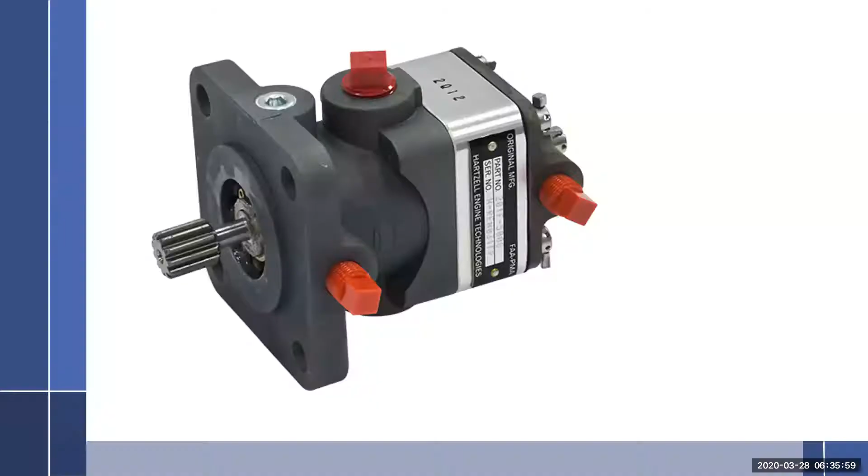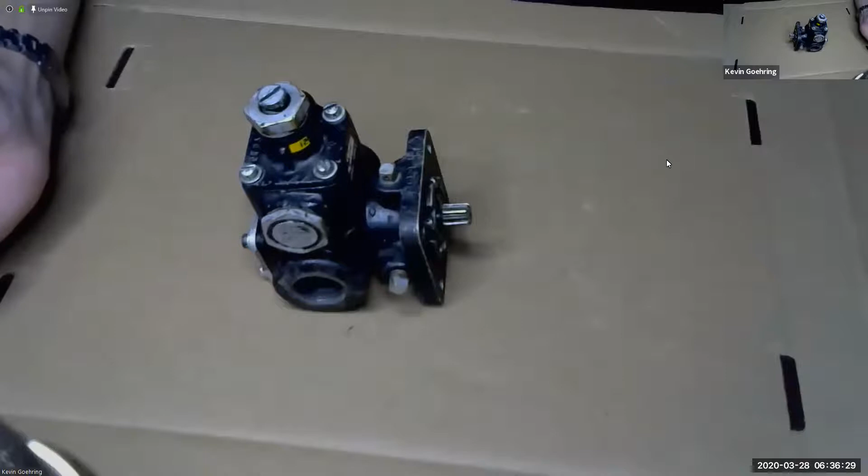Thanks. See what I mean? There it was. Now it's not. We're just gonna switch it. Finally. All right. Okay, you guys can see that okay, I take it? Let me see if I got a full screen. Oh, that's even better. Okay, so light looks okay for you guys? You're seeing everything, hearing everything okay? Yes, it looks okay. Yeah.

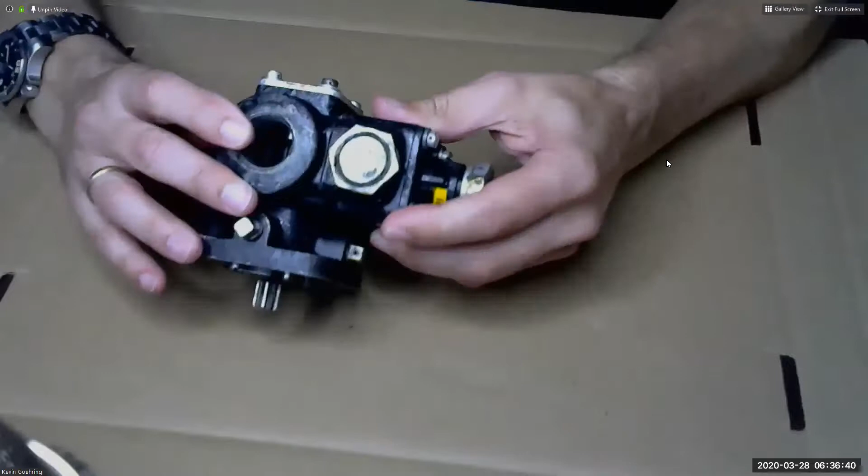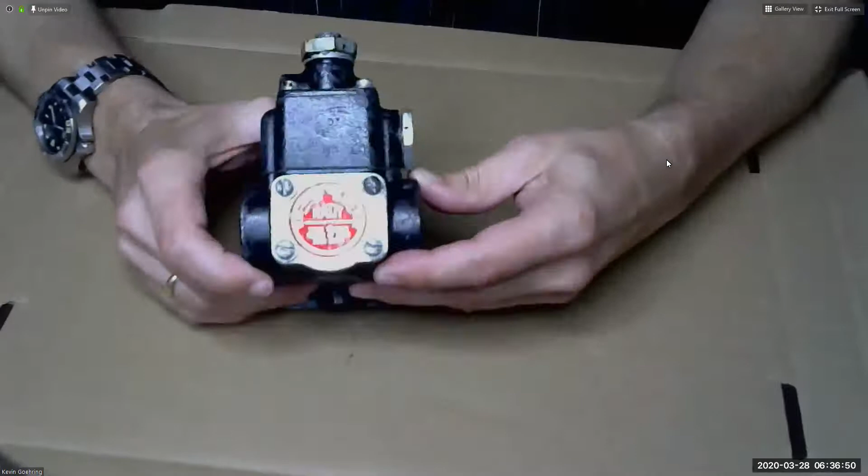All right. This is the rotary pump that you're going to work with. We have inlet and outlet, outlet and inlet. Let's see, I picked kind of a bad one here. You can't see that real well, but here's some arrows. And that little plate says inlet and outlet. That little plate tells you which one is the inlet and which one is the outlet, depending upon which

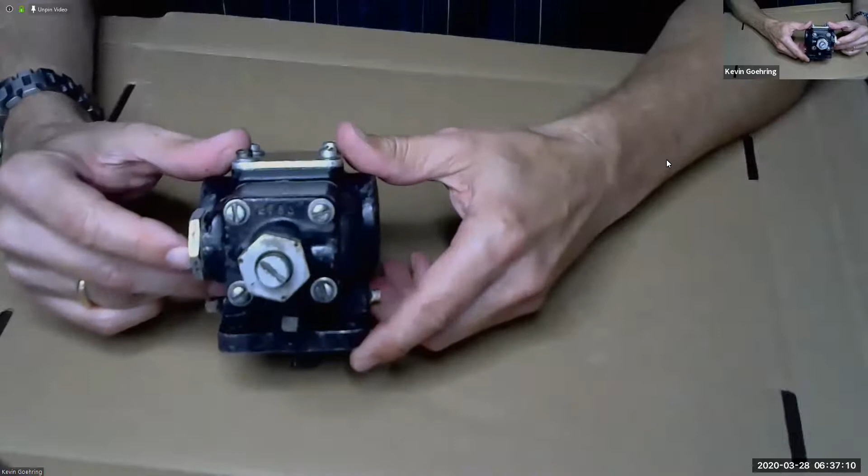way this rotates. Which way does it rotate? Well, it'll rotate either which way. So if I'm rotating it this way, is that clockwise or counterclockwise? Counterclockwise. All right, remember, the rotation of any component is when viewed from the drive end. So don't look at it here where it says it's going that way around and say, oh, okay, that's clockwise. So I'm turning it the way the arrow goes right now. Is it clockwise?

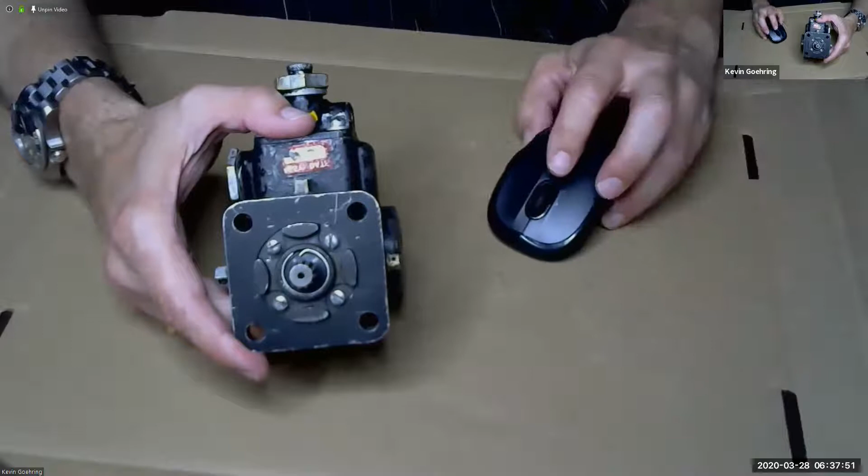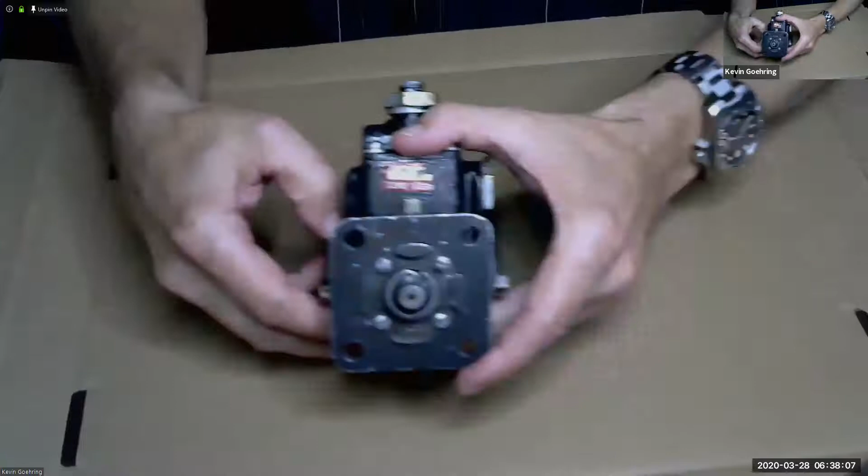Hey, Kevin. On Zoom, with the camera stuff, there's a mirror effect on. It's a weird setting. Oh, yeah, it's a mirror image. And it's also different when we look at it from your notes versus your actual webcam. Different views. How's that look? Left is right, right is left, just on the opposite side. Well, maybe I'll just, I don't know, I won't talk clockwise, counterclockwise then. Be careful, because to me it's going around. Yikes. This is just wonderful today. Why is it doing that? It's Monday. There is a pretty big delay when you move your hands. I think it's your internet, Steve. How would you know if I just moved my hand?

All right, let's get back to this. I will make it simple then. The direction of rotation is when viewed from the drive end. Clockwise is clockwise, counterclockwise is counterclockwise. Never look at this plate and try and determine the drive end from this plate. You can figure out which way it rotates, but don't look at this end. Got it? Hopefully you got that. Okay.

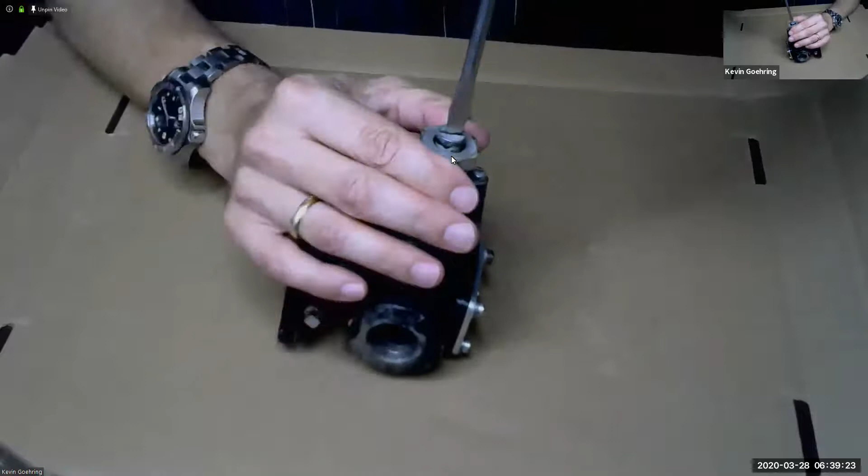So on the top, here's a lock nut. And that lock nut allows me to rotate the screw. This would be to increase pressure, screw down, unscrew to have less pressure. All right, we can take it apart. I just simply grabbed stuff from the cabinet and went, so hopefully this is a good one and it's not all messed up inside.

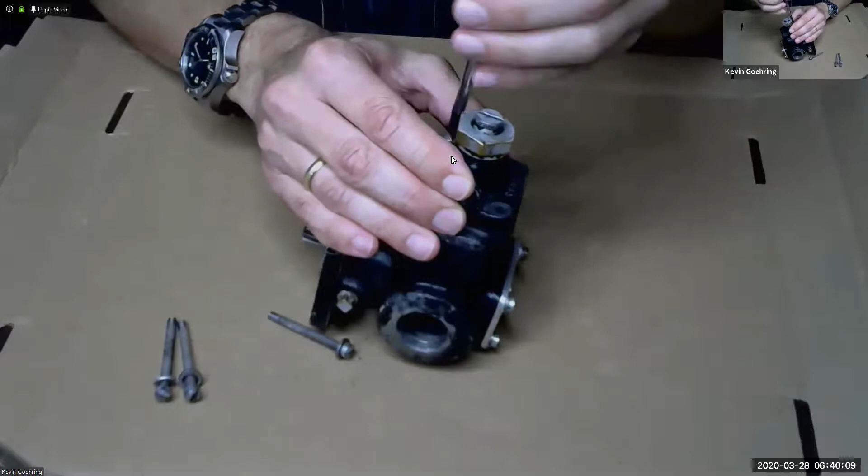There's a hole right here. What do you suppose that hole is for? Air bleed. Deck pressure. Bypass. Ooh, I heard one right answer. Bypass would be no. Mark had the right answer. Deck pressure, upper deck pressure. Yep, so this is a compensated fuel pump.

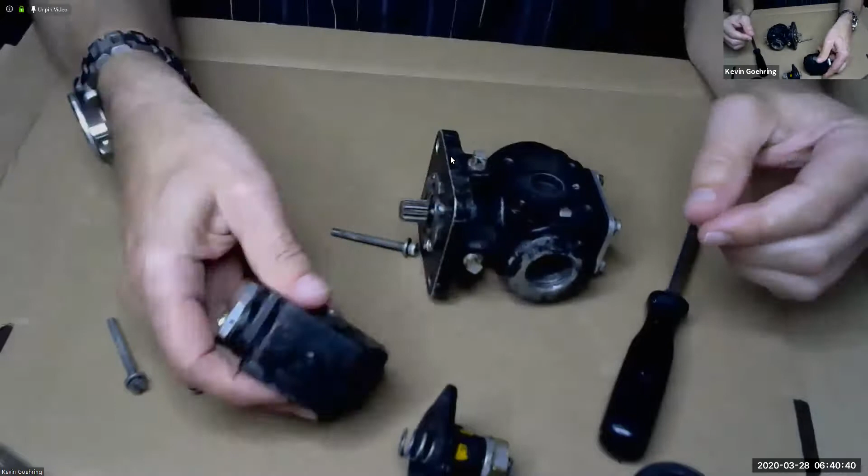All right, so I'm gonna pull that out. Got a spring. That's the spring pushing down on the diaphragm. Lift up the diaphragm, pull that out of the way. And inside here is the little cup. We'll go through that. This should come apart. Don't look. Any tool's the right tool. Plate off.

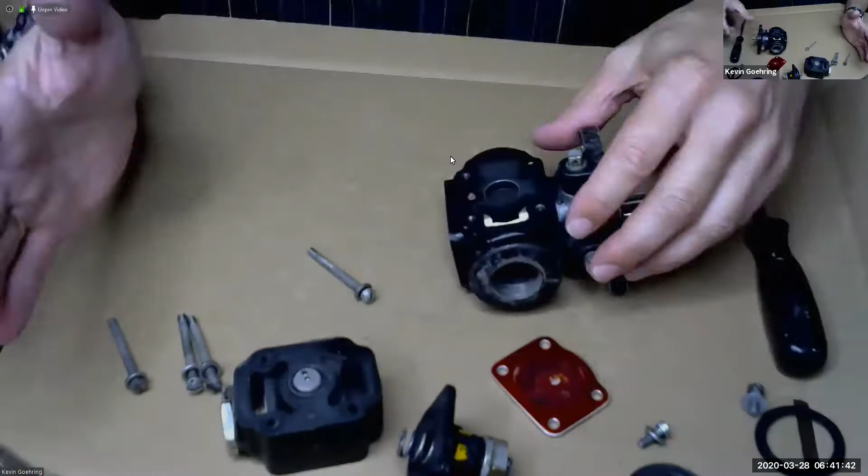Let's see if I can get it apart. These little O-rings right here are really delicate. There we go. A lot of this you have to press apart, and I don't have a press, so I'm just gonna leave it like this for now. We can talk about how it works. Right now, the pump could rotate clockwise or counterclockwise because this is going to dictate which way is the discharge and which way is not the discharge.

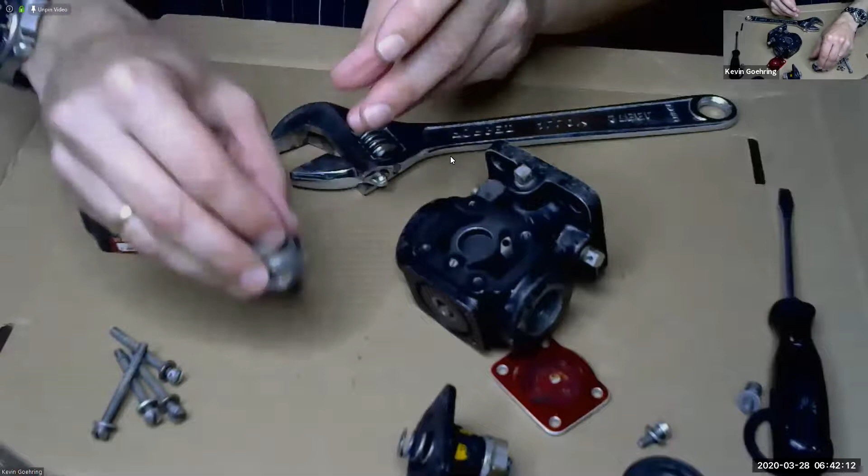Let me see if I can get this thing off here. This is the discharge end, and you'll figure that out in a little bit because here's a little tiny lightweight spring and a little plunger. So, all right, let's talk about what we got. A couple things. One, we talked about this hole right here, and that in fact goes to the upper deck pressure.

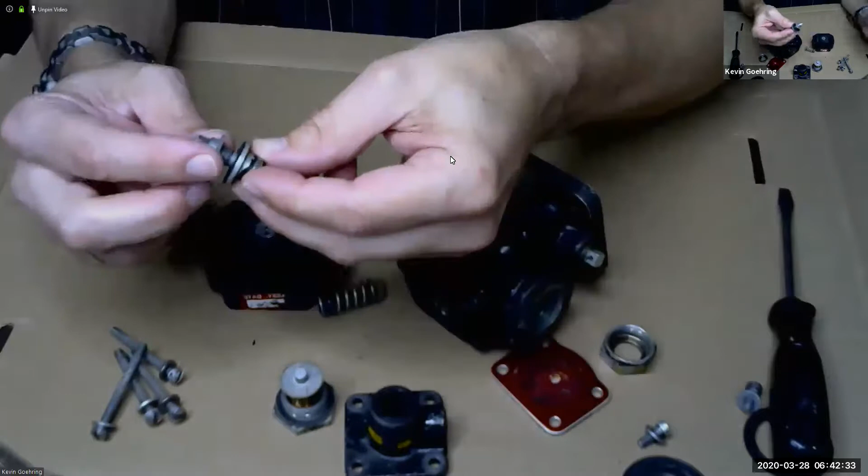This is the screw. Get over here. This is the screw and the adjustment that is going to go to the spring, and that spring is going to press down on the plunger apparatus.

All right, the funny thing about this is it's a left-hand thread. If I screw it in, it comes apart. So I'm screwing it to the right, righty-tighty, lefty-loosey, but it went backwards. So the fun part about that is I say, well, it's backwards thread. So if I want to increase pressure, what do I do? Tighten it. And this is where you could chime in. Going to counterclockwise. So to increase pressure, I unscrew it.

Yes. Nope, I want you to think this one through. I'm going to screw it to the right. I'm turning it down. And as I turn it down, is it going to put more or less pressure on the spring? Less. More. It's getting further away from me.

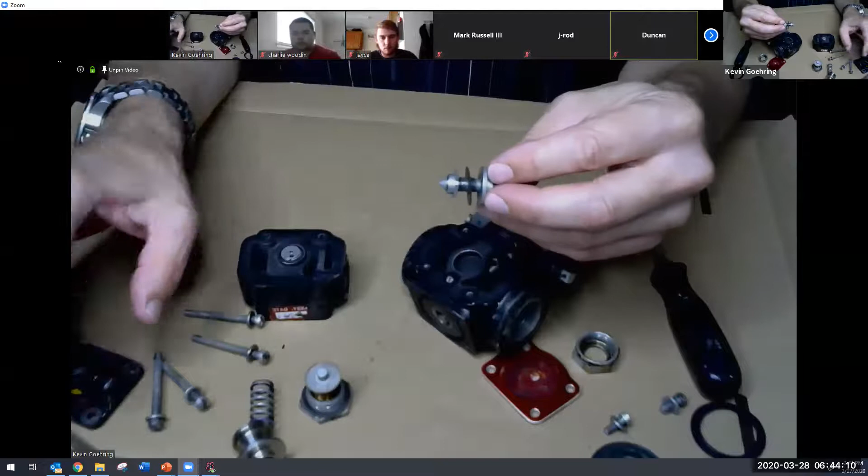So confusing because the video's mirrored. Keeps messing me up. Well, then it keeps going back to your notepad, which is a lot of fun for me. Yeah, you said you were going right, but it looked like it was going left. Oh, okay. And on my end, it's showing your notepad. Well, I have no idea exactly why I keep losing the video. I'm just gonna leave it like that. Okay. Yeah, the rights and the lefts are really screwing with you guys. Anyway, I'll just do my best then.

This is backwards thread. Doesn't matter that it's backwards. Let me just make it simple. It goes inside of here. And when I screw this thing down, righty-tighty, and I'm screwing it to the right, it increases pressure. Why? Because it moves this thing down the shaft and puts more pressure down on the spring that is inside of here. That spring is putting more pressure.

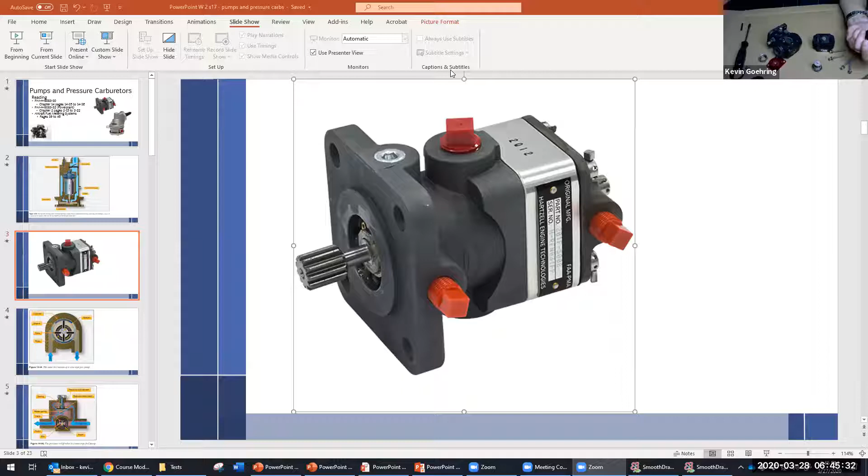Are you kidding me? You guys keep losing the video, right? Yeah. Yep. All right, it says it's pinned. I did nothing. I did not touch anything. Are you guys messing with it? No. Let me try something here. Share. Let's move my screen over. Oh, that didn't work at all. You don't get paid enough to do this.

You can see it on your actual video feed. Like, if we were just looking at you talk, we could see it. You can see it right now. Do you see a full screen right now? I can see a full screen. If you can click on the dots and pin it, I can see it full screen. Oh, if you see a full screen, maybe I shouldn't worry about it. Whoever can't see him needs to pin you and then make it full screen. Okay. Pin it, make it full screen. Got it? All right, because I can see a full screen on one of my things. And it might have something to do with my little camera over here. I'm gonna have to unplug that other camera.

All right, so let's try and see if we can run through this thing. See, like I just lost it again. Hopefully you guys don't. I'm trying to plug in this. There we go. Maybe that has something to do with it. I've got a second camera set up that I was going to do something with, but we'll see if that had something to do with it.

Okay, so let's say this is going around this way, whichever way that is. And so if you can look inside there, you should be able to see the little vanes going around. And no. Okay. So the vanes are going around. So that means that the vanes are going down and around. Well, that's not really the way I want it to go. I'm going to try something here because, you know, everything is working so wonderful. Why not just add complexity to this?

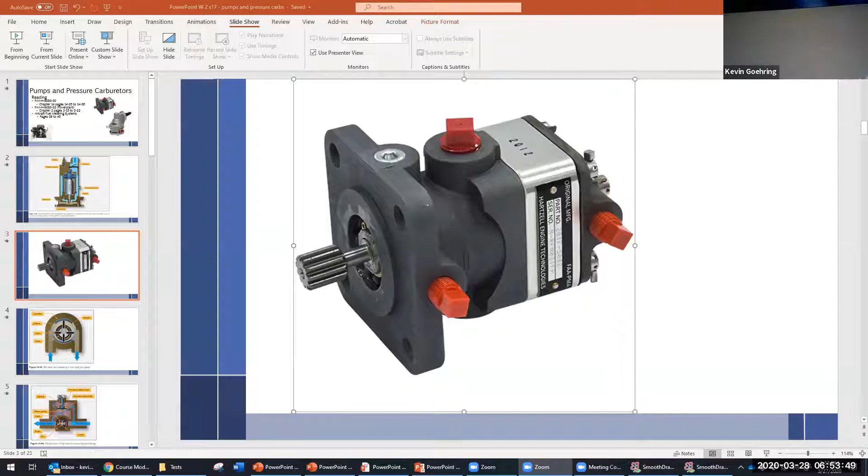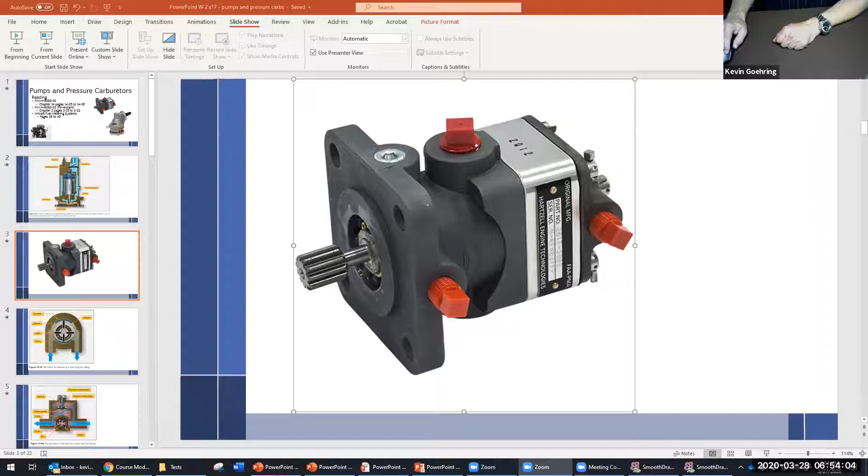And my camera is kind of making me crazy. So given that didn't work out as well as I'd hoped, I'm going to change this to screen 2. Share screen 2. Okay, you should be looking at the notepad. You guys looking at the notepad? Yep, I see it. All right. Well, let's just hope that the notepad stays, because if it doesn't, it's going to be a long afternoon.

All right, so we've talked about pumps and we've talked about carburetors, and we are ready to start talking about pressure carbs. That's going to be exciting. All right. So pressure carburetors are a whole different animal. Now it's good that we know how carburetors work, and we can take the concepts that we've learned with carburetors and apply that to pressure carburetors. So let's talk about what they are and what's different about them, and then we can go from there and talk more about how they work.

First, I'm going to turn off this insanely bright light. There we go. Insanely bright light is now off.

Okay, so what do we know? We still know about mixtures. We learned all about mixtures. What is stoichiometric? What is best power? If it's too rich, it won't run. If it's too lean, it won't run. We know we need stuff rich at wider open throttles. We've learned that carburetors are prone to icing. What other kind of stuff do you guys think about here? We know that they don't work upside down. They don't work in zero gravity. And they're prone to icing. So if we take a look at all this stuff and think about it, the next evolution in carburetors became pressure carburetors.

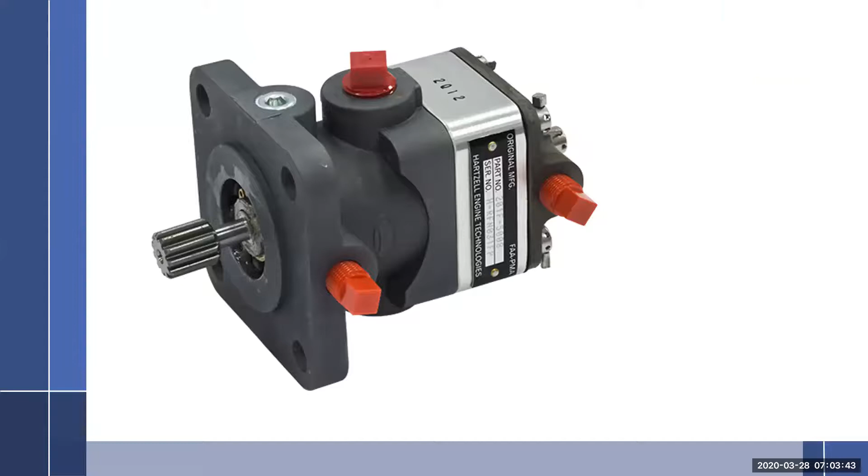No, I wanted this one. That looks simple. I know, I could do that. Well, why it chose not to, I don't know. So let me see. Maybe I got two things running at once. There we go. So let's pull this down. The simplest of things are just not even going well today. There we go. Yeah, I'll pass.

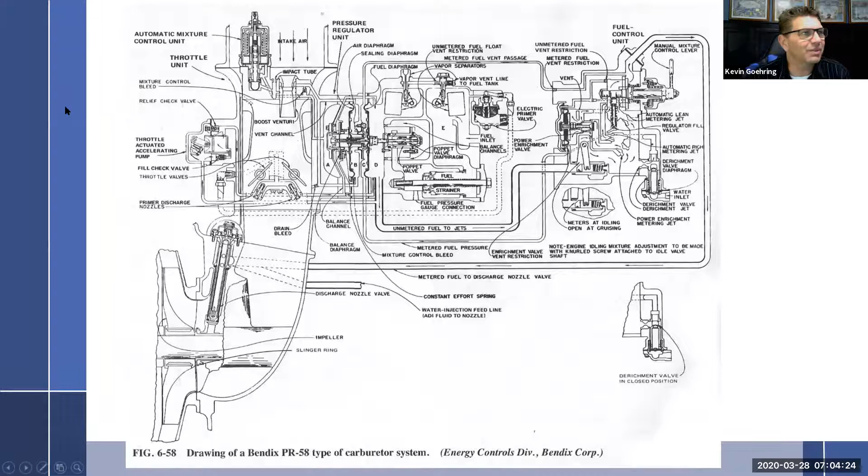Okay. This is a PR58. This is the very large carburetor that actually sits up on the shelf. It's about a foot by about 10 inches. So we are not going to be going through this one. We're going to go through more simplistic versions, and bring it down so you can understand the concept of them. There's no reason why you can't take apart an MA3, MA4 type carburetor. They're all fairly simplistic. This one, not so much.

So the way we say it out in the field, when they work, fantastic. Don't mess with them. Don't touch it. Don't even look at it too much. Just kind of at the corner of your eye. Don't let it know you saw it. That's kind of a joke, but you always keep fueling them. You never let them run dry. When you let them run dry, you risk the diaphragms inside cracking. And once they crack, you have to rebuild the whole thing. And the cost to rebuild one of these things has got to be rather large.

So you don't see a lot of aircraft with these. Even within our fleet of aircraft at the hangar, we do have one aircraft with a pressure carb, and that's the V-tail Bonanza. Most of them, at the point where they wanted to get more sophisticated and go with a pressure carb, decided to go with a fuel injection system. And when we get into fuel injection systems, you're going to see that Lycoming does things very similar to a pressure carb. Continental does things completely different than anything you've ever guessed. So, all right, so better protection. Yeah.

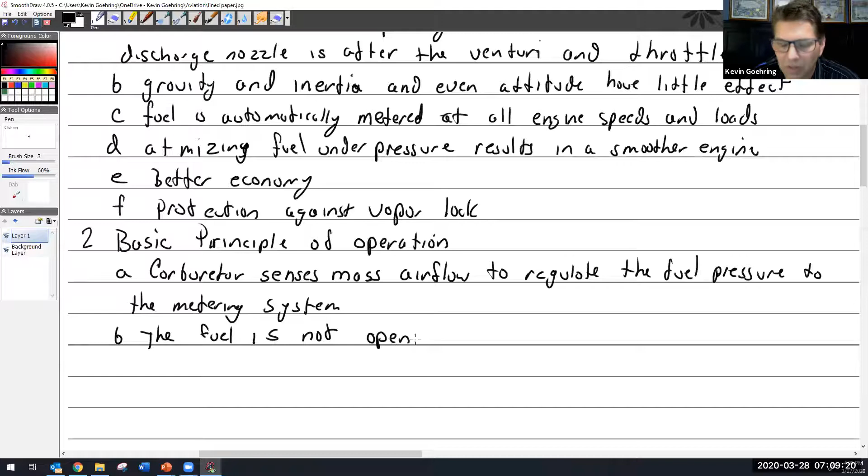It's not as complicated as it may sound up front, but at least I'll try not to make it that way. So the fuel, I'm having all kinds of problems, I'm having a delay while I write here, is not open to the atmosphere like a float bowl is. With a float bowl, we always look for the venting in it. Well, we're not going to get that this time. So fuel is under pressure from the tank, that's the fuel tank, all the way to the discharge nozzle.

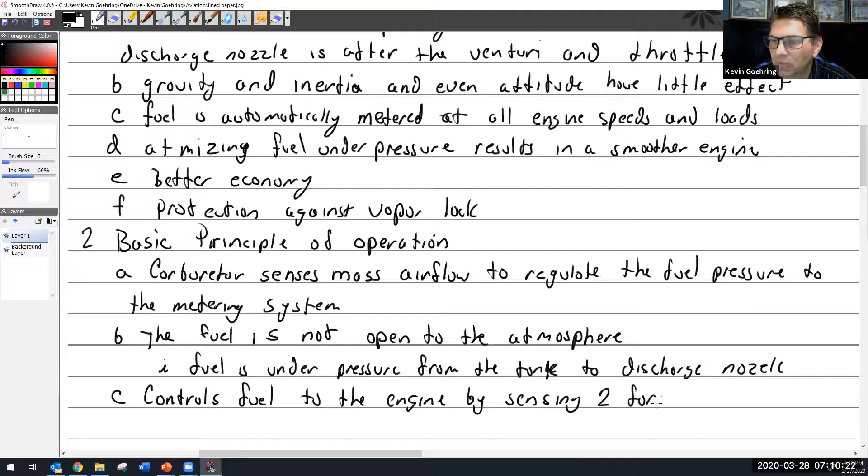And the basic way it does this, it controls fuel to the engine by sensing two forces. And those forces, thankfully, are well named and make sense. Air metering force, which, unlike the carburetor, is 100% air. There is no fuel in the air metering force. It is all about the air. And the second one is fuel metering force, which is all about the fuel and has nothing to do with the air. So two completely different systems.

You take the air on one side, and the carburetor is actually an analog computer, and it's figuring out the air and how much is coming through and doing its thing. And then it's going to come over here into the fuel, how much it's doing. And then through a series of connections, it's going to control it and send it off to the metering system, where the metering system decides, should we go a little bit leaner or a little bit richer? But once it's set, it's going to give it what it wants.

Is that all done mechanically, or is it electronically somehow? Zero batteries. It's all mechanical. Okay. Is that air metering force? Air metering. Yes, it is force. Thank you. Air metering force. All right. So I want to switch off to a clean notepad and make a drawing, but I want to make sure everybody gets a chance to finish this up.

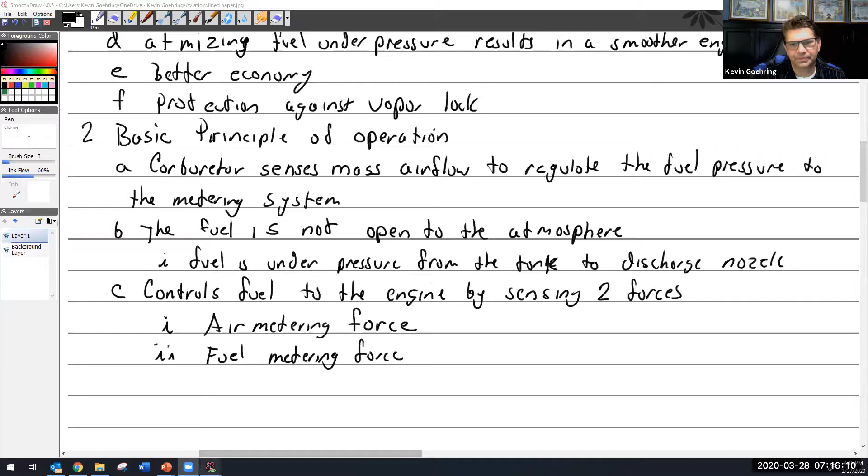We'll bring this over here. All right, we're kind of getting in the middle of this thing so I can write some stuff. Where to begin? Okay, so if we were going to design a pressure carburetor, we're going to build a very simple one. We're going to learn how a very simple one works before we add any sort of complexity, because just like anything else, we can start adding automatic mixture controls, we can add accelerator pumps, we can add all sorts of things. But first, we're going to build a very simple one.